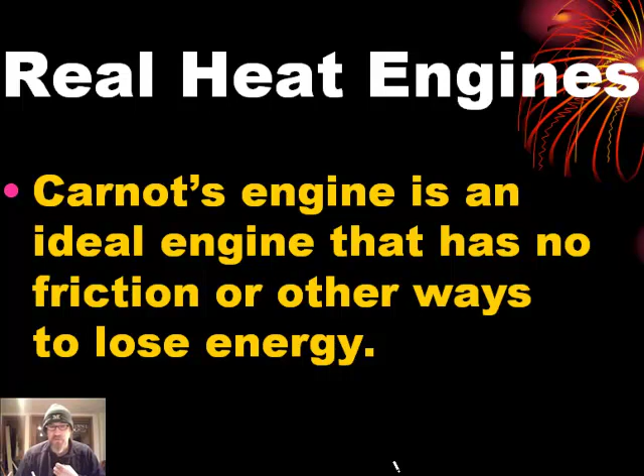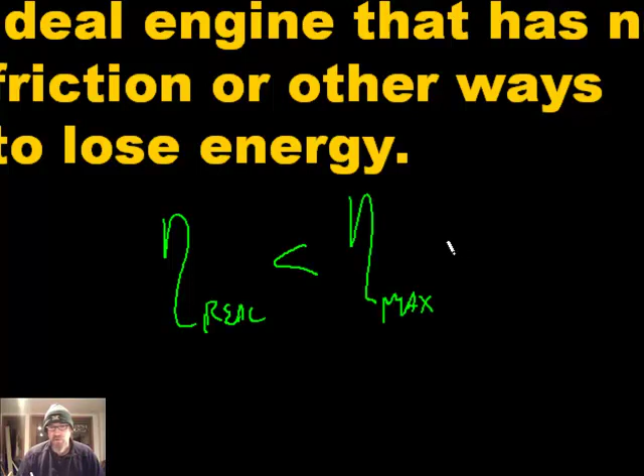A thing to keep in mind is that Carnot's engine is fictional. It's an ideal engine that doesn't really exist. It has no friction and no other ways to lose energy other than doing work or energy going straight to the heatsink. So for a real engine, the real efficiency is always going to be less than the Carnot efficiency, always less than 1 minus T low over T high.

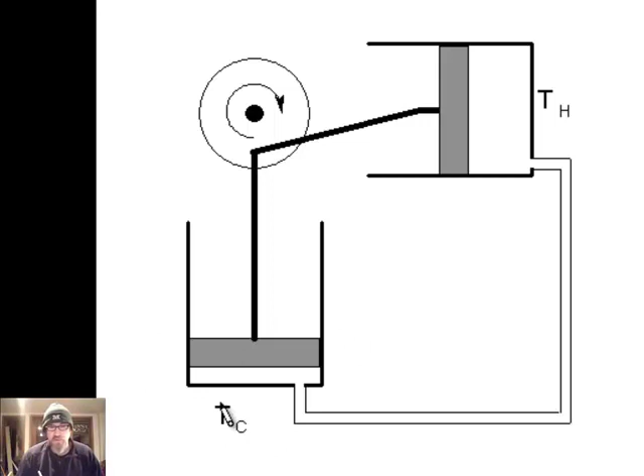A simple example of a real engine is something called the Stirling engine. One common design looks like this, though there's more than one way to set it up. Here you've got a cold temperature sink, which might be enclosed in ice or some cooling fluid, and a hot temperature source, maybe a flame from a candle, a gasoline fire, or solar panels. They're connected by this shaft. These are pistons, with gas trapped in each, but that gas is connected. It's really one volume of gas that moves between these two cylinders.

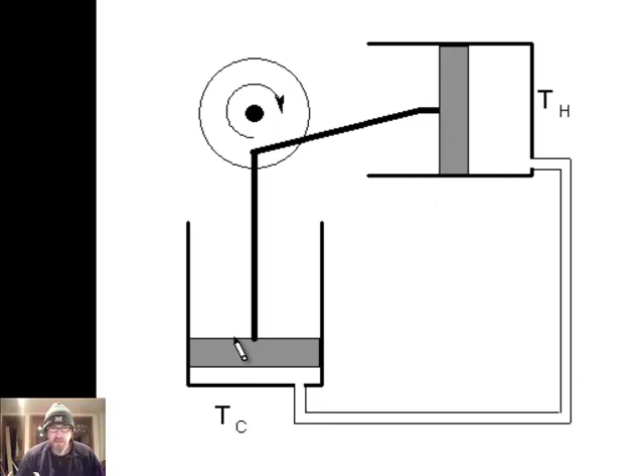In the first step of this cycle, the gas is being heated by this Q from the external heat source, so the flame heats up the gas. When you heat up gases, they expand, so what we have here is an isothermal expansion. The crank turns because the gas expands, and as the crank turns, this shaft gets pulled on, which means this piston gets pulled on, and that forces gas to go into the cold cylinder.

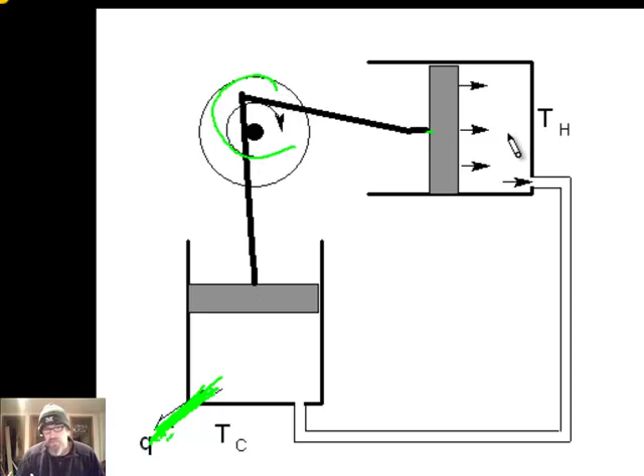What happens next is the fluid cools fairly quickly, isochorically, without much volume change, as the momentum in the crank forces the fluid into the cold cylinder. Energy is lost through heat very rapidly to ice or cooling fluid as the crank continues to turn, pushing more of the hot fluid into the cold cylinder where it cools down. This happens while the volume doesn't change much, because the piston is near the top of its motion, moving upward much more slowly and nearly coming to a stop. Then the crank continues to turn.

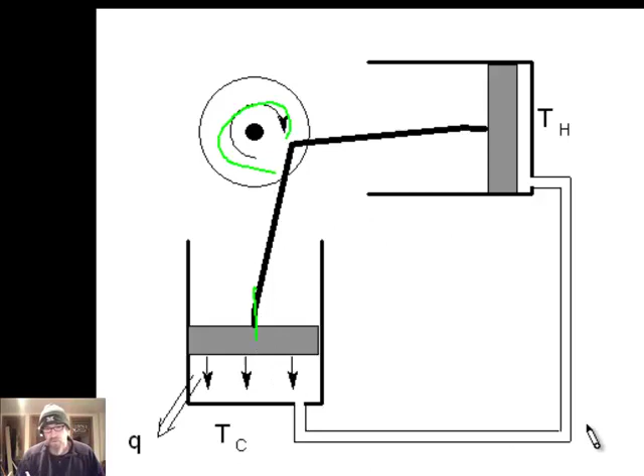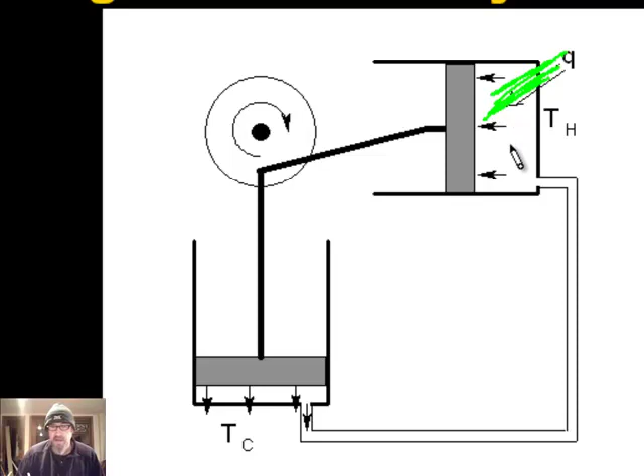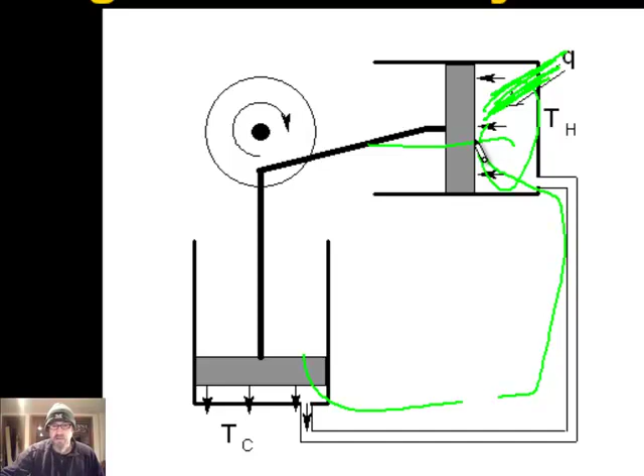As the crank turns, it pushes the piston down in the cold cylinder and moves the cold fluid back into the hot cylinder. Then the process starts over, because the momentum of the piston starts to expand the hot cylinder again. Q begins to go in from the hot source, heat flows in, that expands the gas, and it starts to push the piston outward, forcing gas into the cold chamber. The process repeats itself over and over as long as there's a temperature difference between the hot and cold cylinders.

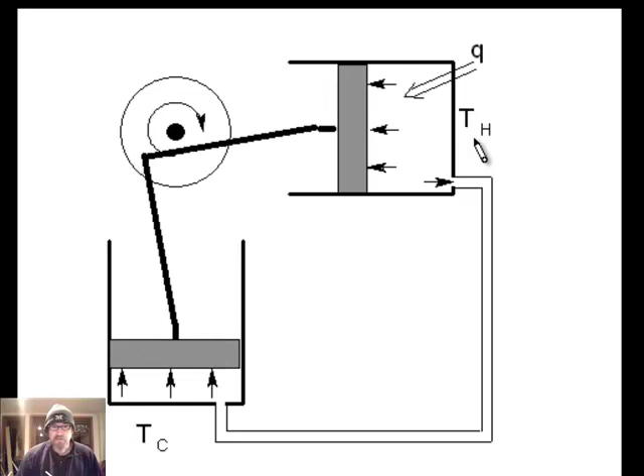There's a constant flow of energy in at the hot source, out at the cold sink, and in the meantime work is done. This is the Stirling cycle. It's different than the Carnot ideal cycle, and so it's less efficient. The primary difference is that you have isotherms, but you also have an isochoric expansion and an isochoric compression. That's not perfect. Stirling cycles are not ideal, so their efficiency is less than that of the Carnot cycle.

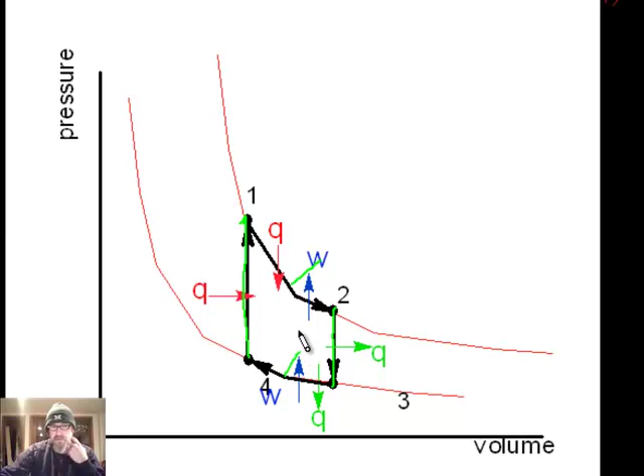There are other heat engines that exist out there. Some are quite common, some are not as common in our modern world. Reciprocating steam piston engines used to be really common; in the 1800s, that's how most power was produced. It's an external combustion engine, so you make steam by boiling it in a place other than where the cylinder is.

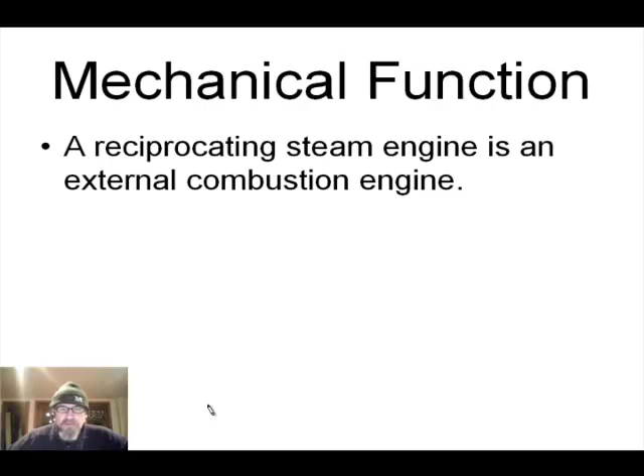One practical application of a heat engine is a reciprocating piston steam engine. This is an external combustion engine. An external combustion engine has the combustion, the fire, happening outside the engine. By contrast, an internal combustion engine has the combustion happening inside the working fluid.

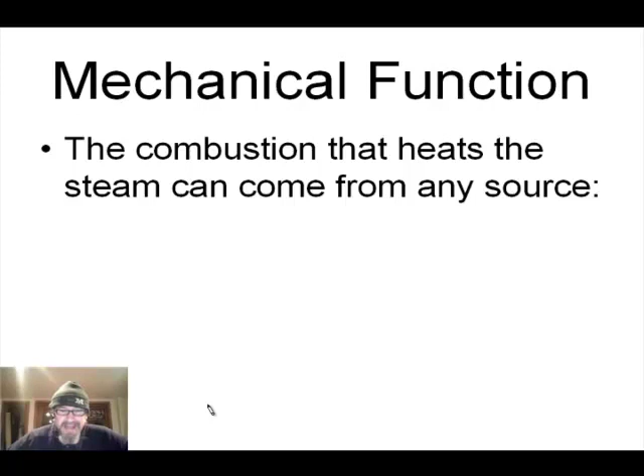The combustion that heats the steam can come from any source. Fossil fuels are commonly used, coal and oil. You could use wood, that's how a lot of steam trains were run in the early days of this country. You could also use any renewable source, or heat it up with nuclear power as well.

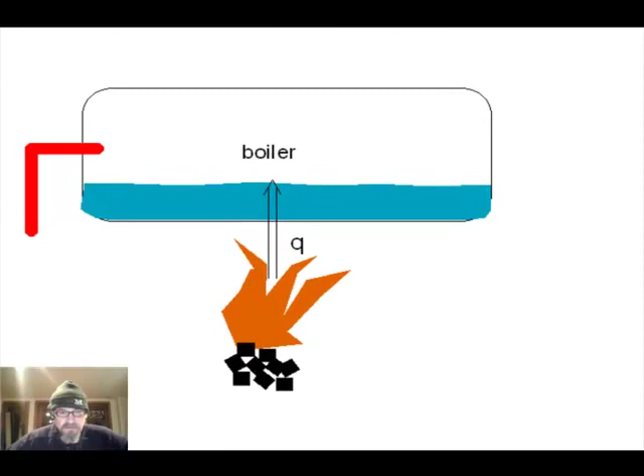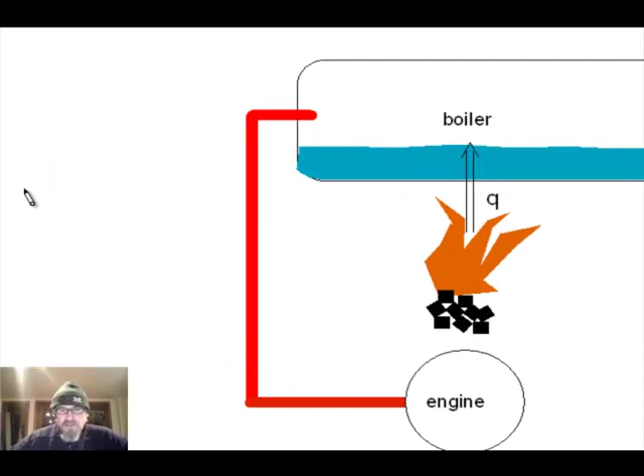The basic idea: you've got a boiler with some water in it, and you burn something, fossil fuels, coal, whatever it is, and you produce a bunch of heat. That heat goes into the boiler and boils the water. Then that steam, now water vapor, runs into the engine. The engine extracts work from it, and that goes into the surroundings to drive your train or generate power or whatever. Then the fluid cools off, loses heat energy, and ends up back in the boiler as liquid water.

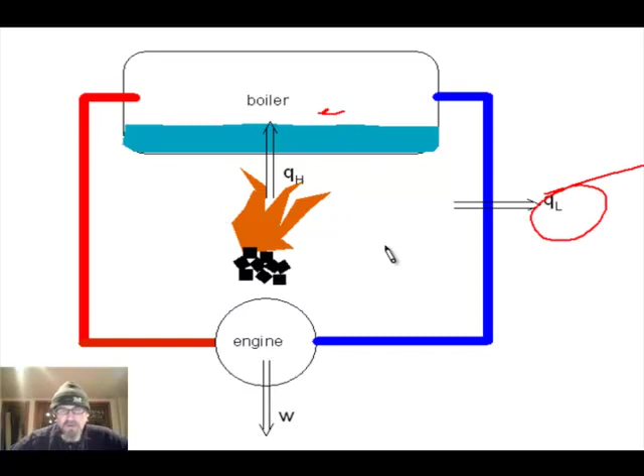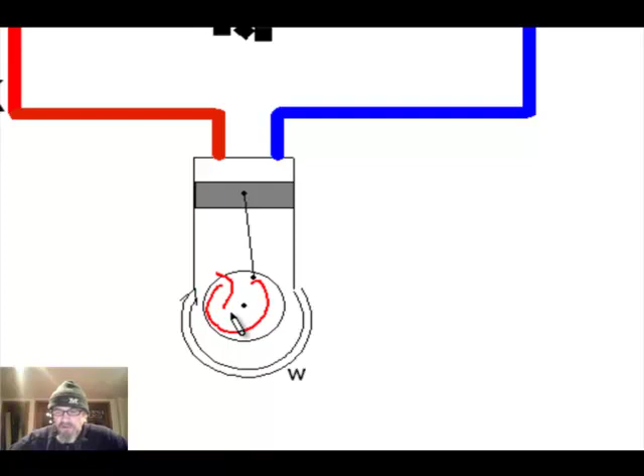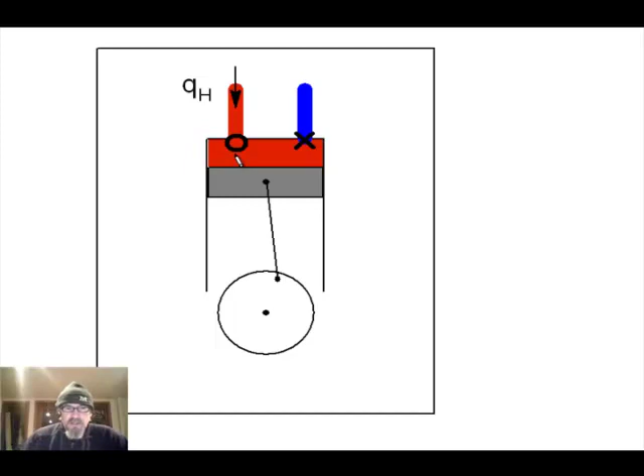If you look close up at the cylinder, there's a valve, two valves actually. One allows gas out and one allows gas in. So the steam coming in, carrying with it some heat from the boiler, enters through this valve when it's open, and that causes the gas to expand. The piston is pushed down, making the cylinder larger, until it reaches bottom dead center of the rotation, and then it starts to turn around.

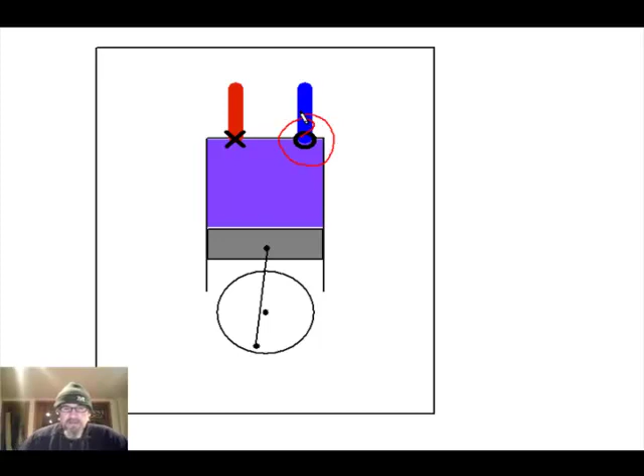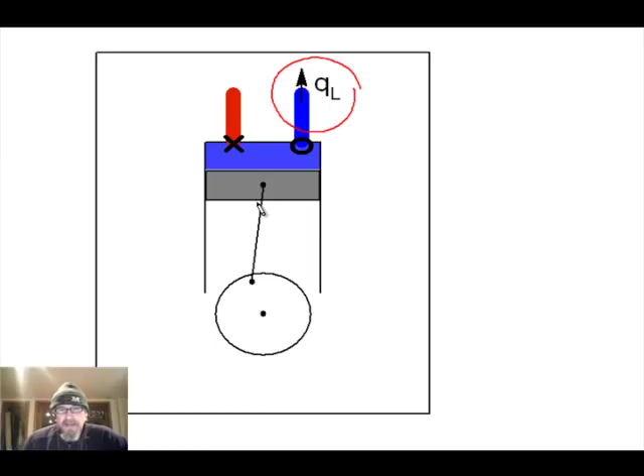This gas is now cooled off considerably, and as the motion continues around, the valve on the exhaust side opens up, and the valve on the hot side closes. The motion of the piston pushes the used up steam out, and energy is exhausted to the atmosphere with the steam. This process repeats itself over and over again, and so you get this circular power output that you can hook up to some device.

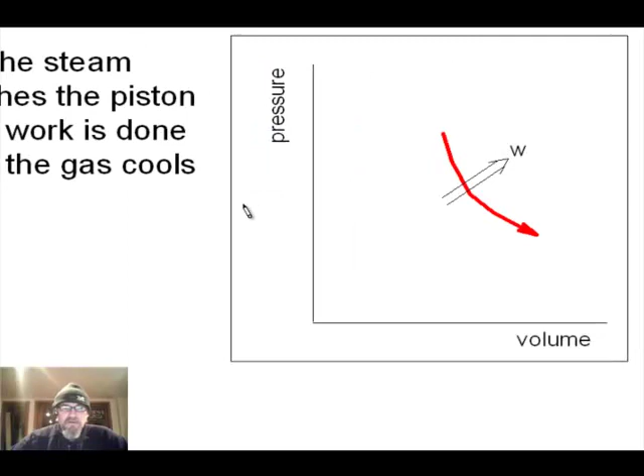Here's what the cycle looks like. As the steam pushes the piston out, work is done and the gas cools off. This is near adiabatic, not exactly, but pretty close. Then, once the piston starts pushing the steam out, the pressure is constant because the valve is open to the exhaust, and so you see a decrease in volume and also a decrease in temperature during this change. There's a loss of energy to the surroundings with the exhaust.

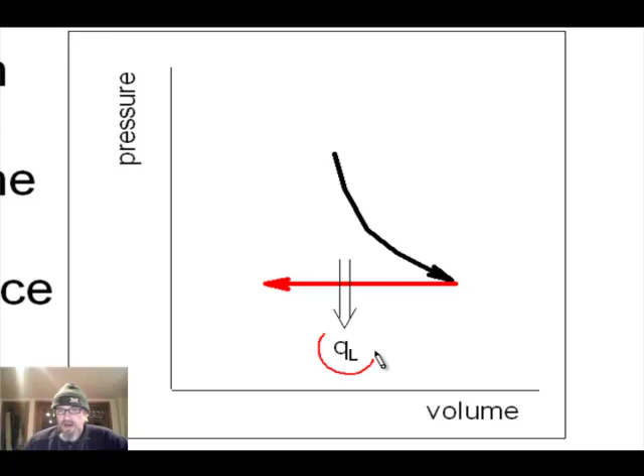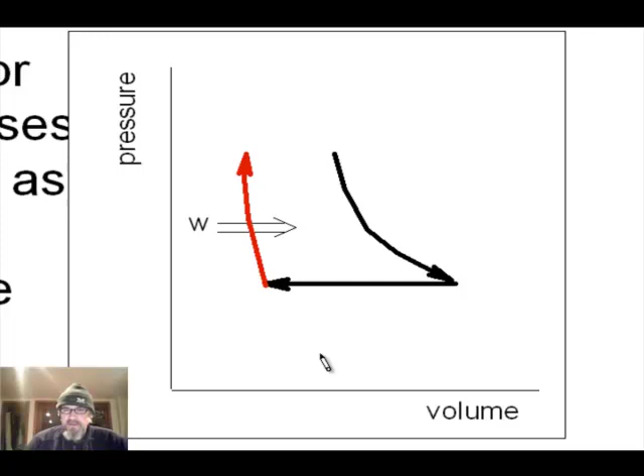Then the compressor, or some kind of mechanical pump, increases the pressure as it pumps the steam back to the boiler. That's going to be near adiabatic as well because it's happening rapidly. Then the gas is heated up and it expands under constant pressure inside the boiler, so that's isobaric. So we have adiabatic, isobaric, adiabatic, isobaric in the steam PV diagram.

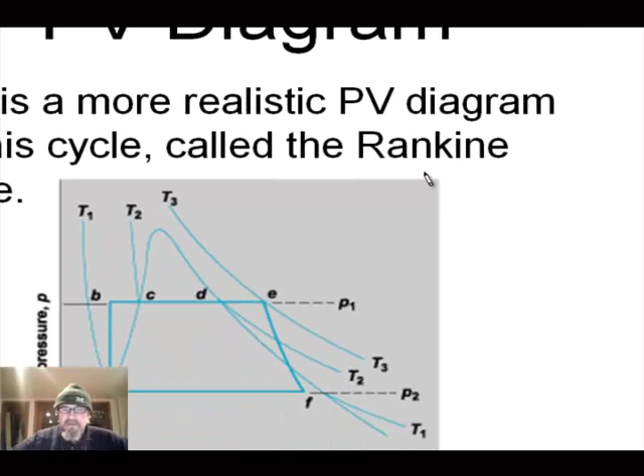This is actually more realistic, this is called the Rankine cycle. If you look at this closely, you notice that the isotherms have these goofy shifts in them. Here's T1, goes down to here, jumps up here, comes back down, and then you can follow T1 out the other side. T2, same thing, pops up here and then comes out there. The reason for that is because you have some phase changes going on. When it changes from liquid to gas, that messes with the pressure-volume diagram.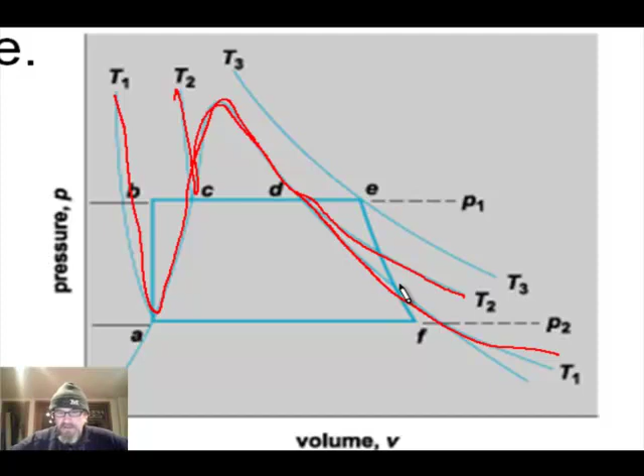The efficiency of these devices is about 10% typically if you have them exhaust directly to the atmosphere. But you can improve the efficiency by several means. One thing you can do is increase the efficiency by having a compressor pump mechanically condense the gas before it goes back into the boiler. Another thing you can do is take the exhaust gas from one cylinder and run that into another cylinder, where it runs at lower pressure.

You can see the pistons are getting bigger and bigger, and they have to do that because the gas is providing lower pressure, so for the same force you need a bigger area. That exhaust gas can then be put into another piston that's even bigger and operates at even lower pressure, and eventually it gets exhausted back to the boiler. That kind of multiple usage can increase the efficiency up to about 25% or so.

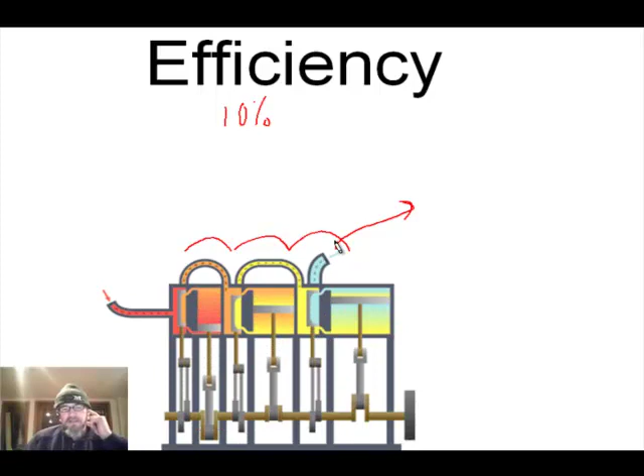What you can do in addition is collect the waste heat as this fluid's going back to the boiler and use it for other things, like heating your power plant, or making another fluid that boils at a lower temperature than water and running a different generator. That way you can get the efficiency up to about 85 or 90%.

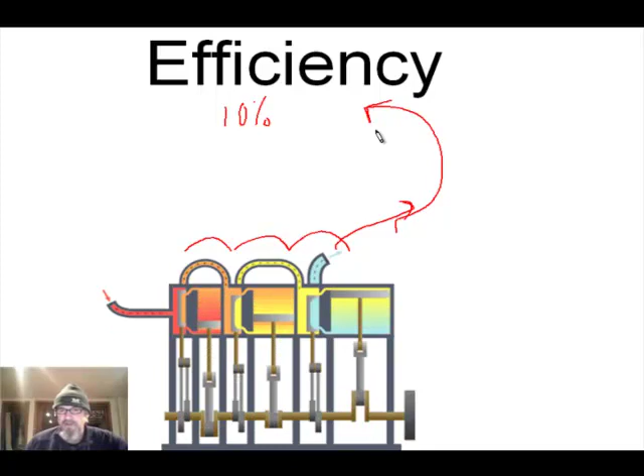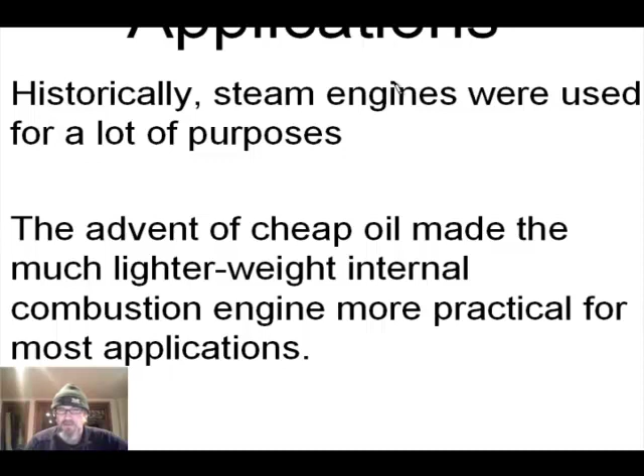Historically, steam engines were used for lots of things. The first real heat engines that were practical were steam engines, and they ran trains, power plants, and mills of all kinds, industrial mills. But when oil became really cheap and the internal combustion engine was invented, internal combustion engines turned out to be way lighter, because you don't have to carry around these giant boilers. That makes it much more practical to use an IC engine, so steam engines kind of fell out of favor, but they're still used to generate power and for a few other purposes as well.

Steam turbine engines don't have a reciprocating piston. They just spin around and around, as gas is forced over some blades, almost like blowing on a pinwheel.

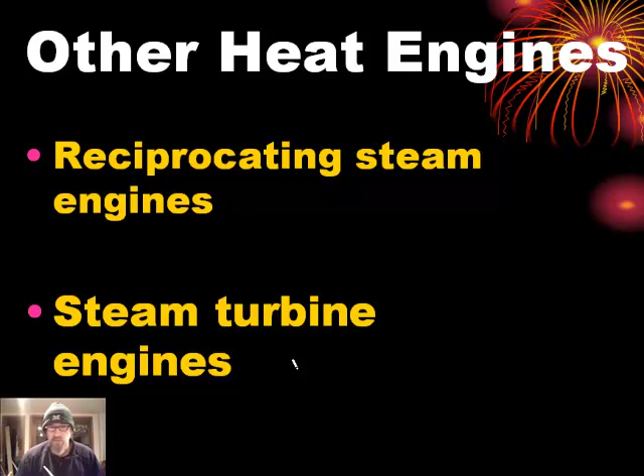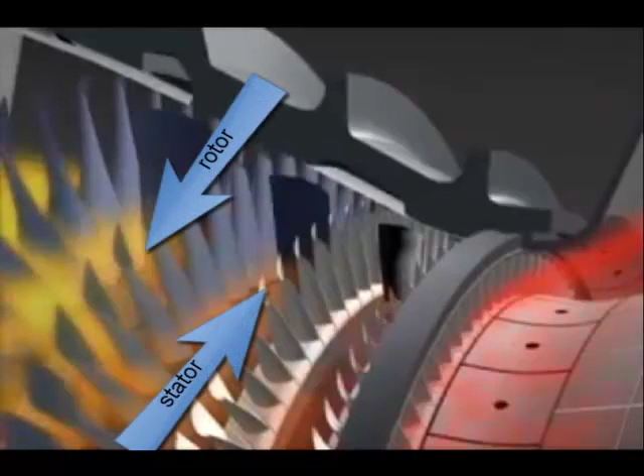Here we're watching a part of a steam turbine, and you can see that some of the rotors are spinning and some of them aren't. The ones that are spinning are actually called rotors—they're like big pinwheels. The ones that aren't spinning are stators; they just stay in place. The stators direct the flow of the steam so that it hits the rotors at just the right angle to cause them to move, like that.

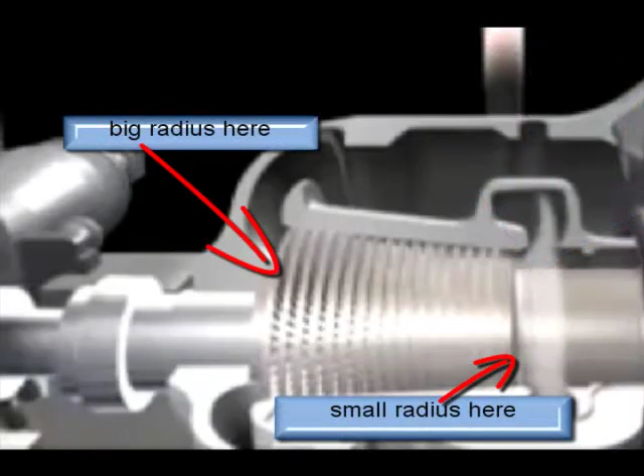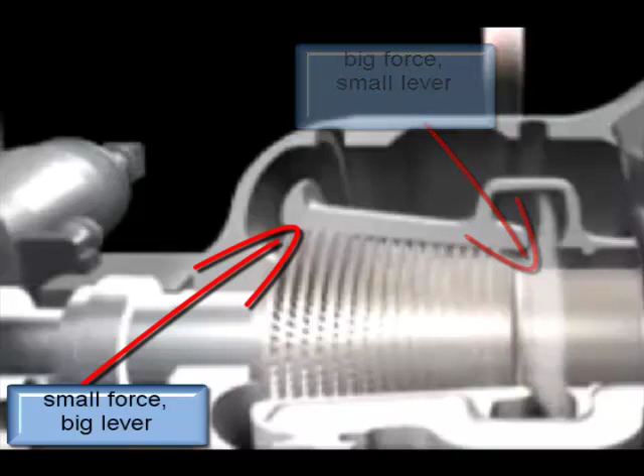What we've got here is a steam turbine stack. We have a lot of stators and rotors here, and those stators and rotors get larger as we move away from where the steam enters at the center. That's because the farther the steam goes, the less force it has, since more of it has been used to turn rotors. With less force, to make the same torque on the same shaft, you need a bigger lever arm, because torque is force times lever arm. So the rotors get bigger, with a bigger radius and bigger lever arm, as you go farther down the stack, providing a constant output of torque. Here we see the steam washing down the rotor and back up a larger stack on the other side, and then the output shaft drives some kind of generator.

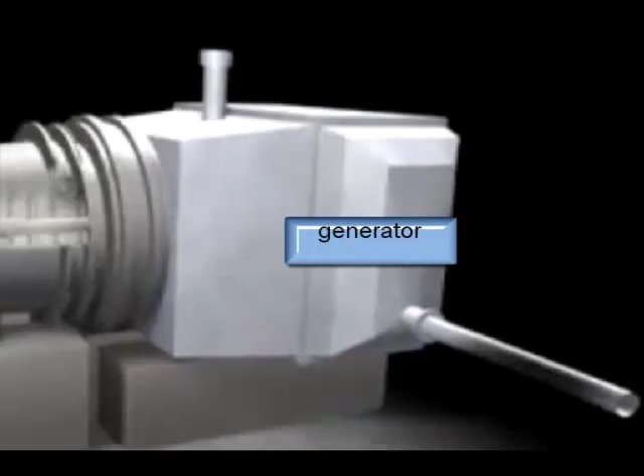Reciprocating internal combustion engines are the ones that are most common today. Our cars and trucks are all powered primarily by these gasoline engines.

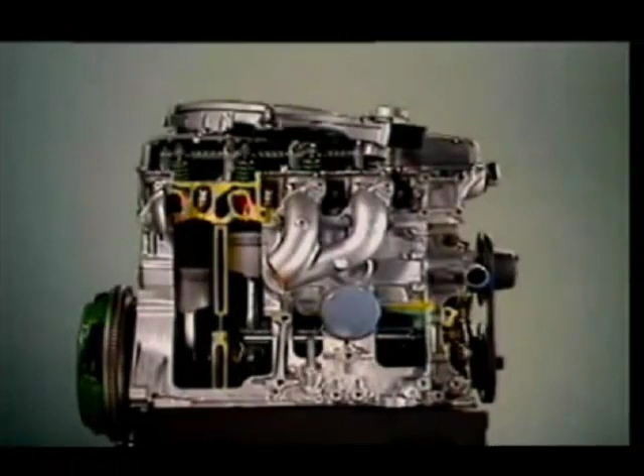Here we see a cutaway view of an internal combustion engine. There are multiple cylinders here. It's a complicated engine with a lot of complicated parts, but the two moving pistons that we see here are the most important things.

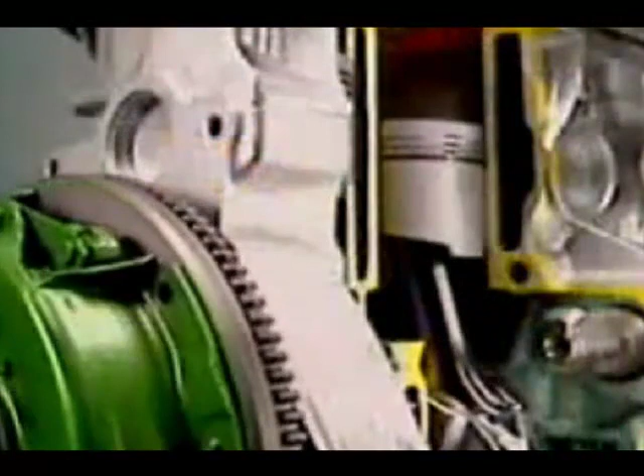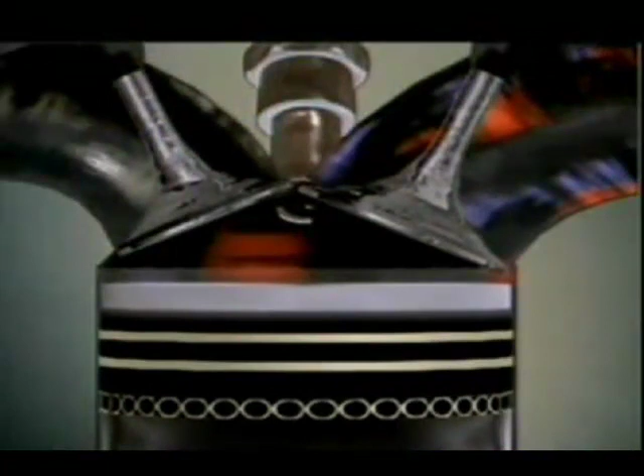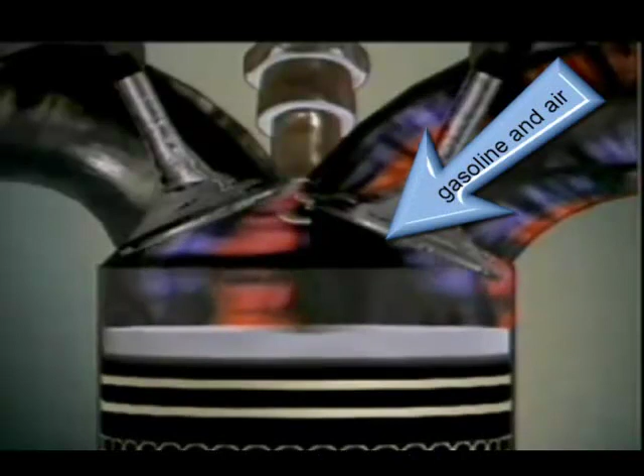We see two valves here. The valve on the right is called the intake valve. That opens up to let a mixture of gasoline and air go into the cylinder. That happens as the piston moves downward, increasing the volume of the cylinder. The gasoline and air mixture rushes into the cylinder until it reaches near the bottom of the stroke, when that valve snaps shut.

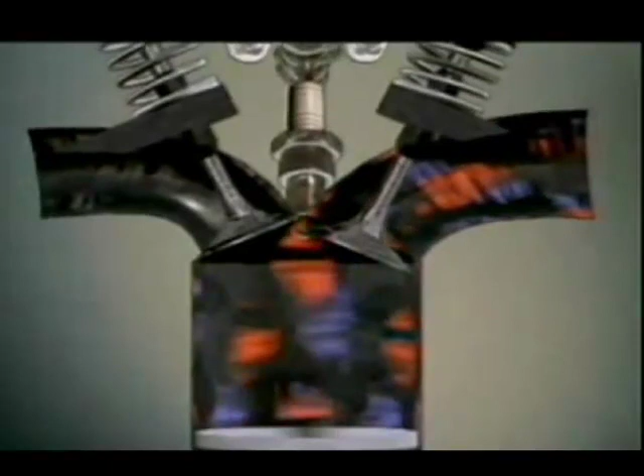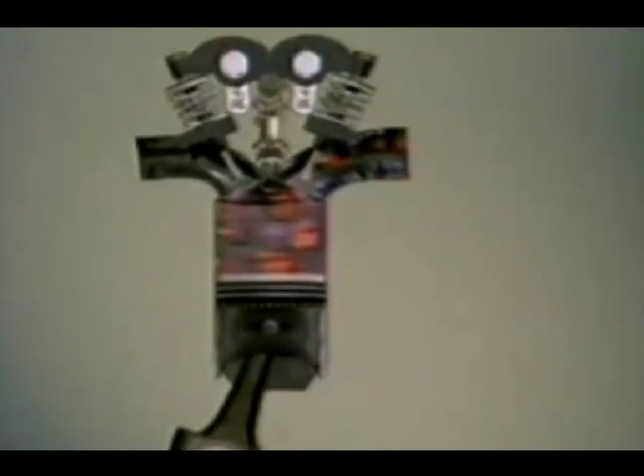With the valve snapped shut, we now see with this larger view that the cylinder is getting smaller as the piston moves up, driven by the momentum of the crankshaft down below, and compresses the gases into a smaller space. It makes their temperature higher, and it makes it easier to ignite.

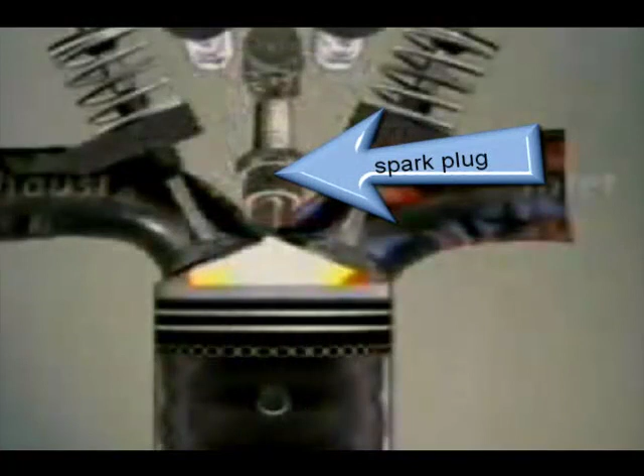That's the next stage. The spark plug located at the top of the cylinder ignites all these gases, and they burn very rapidly. That causes them to expand, which pushes the piston back down, increasing the volume of the cylinder.

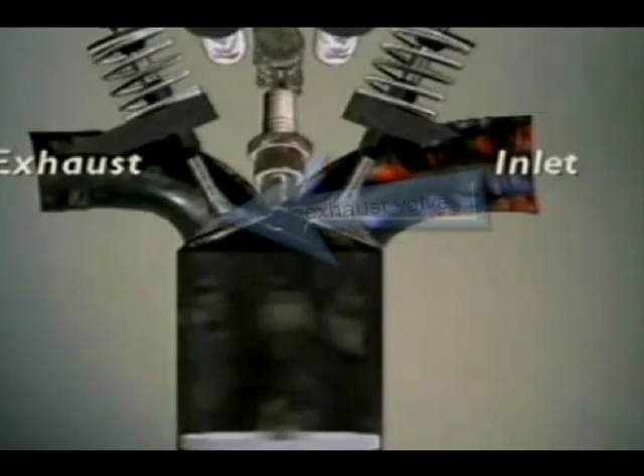Next, the exhaust valve on the left opens up, and the exhaust gases, the products of combustion, are pushed out of the cylinder as it gets smaller when the piston moves up.

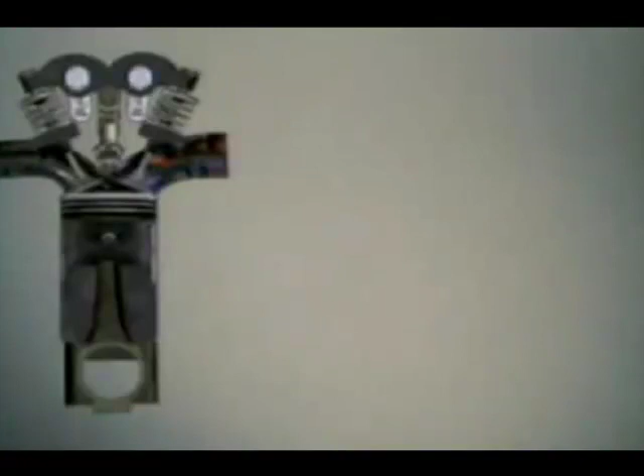Let's watch the whole cycle in action again. Here's intake: air and gas go in. Intake valve shuts, the mixture is compressed, the temperature rises, and the spark plug ignites it. The power stroke occurs — rapid combustion drives the crankshaft around again. Then the exhaust valve opens, and as the cylinder gets small with the piston being pushed up, the exhaust gases leave.

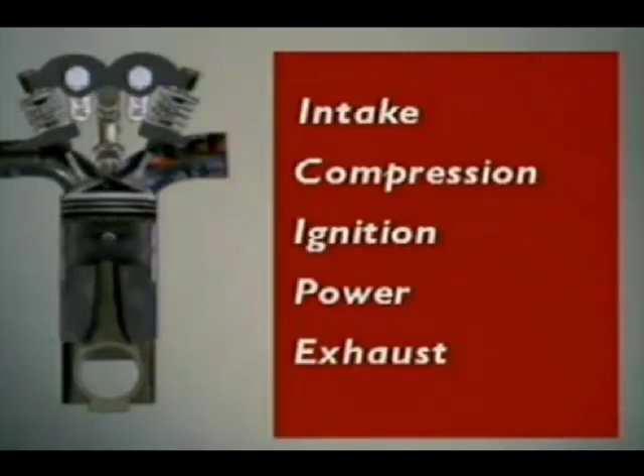Diesel engines combust a different way. They combust diesel fuel. Gasoline engines require a spark; diesel engines don't. Compression gets it hot enough just to light it off that way.

And then there's another type of engine that's less common today, and that's a rotary internal combustion engine. Sometimes these are called Wankel engines.

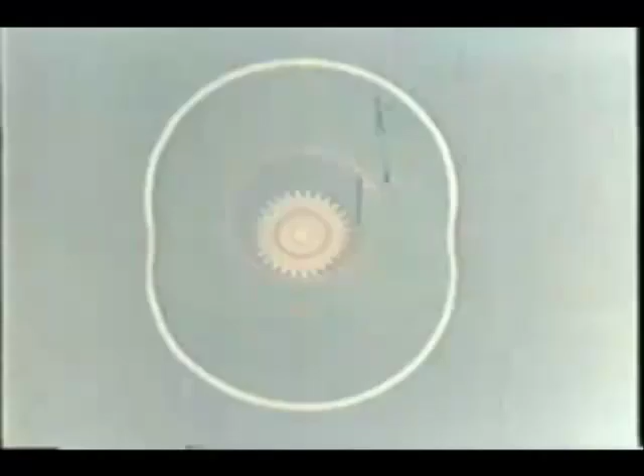The rotary engine is based on this very clever idea: if you offset it, make it not go on a centered circle, this tri-lobed, triangular-looking rotor sweeps out this shape. Someone decided to take advantage of this fact, that it makes different size spaces.

You can see this volume of gas getting squished down into a smaller space and then opening up into a larger space again. As the rotor continues to move around, the space the air is squished into gets smaller again, and the cycle repeats itself.

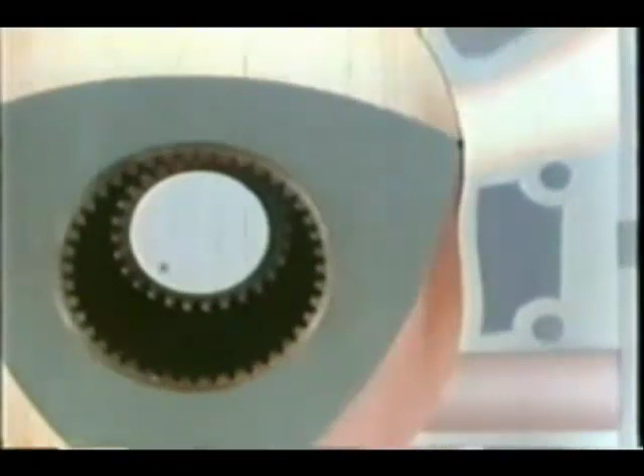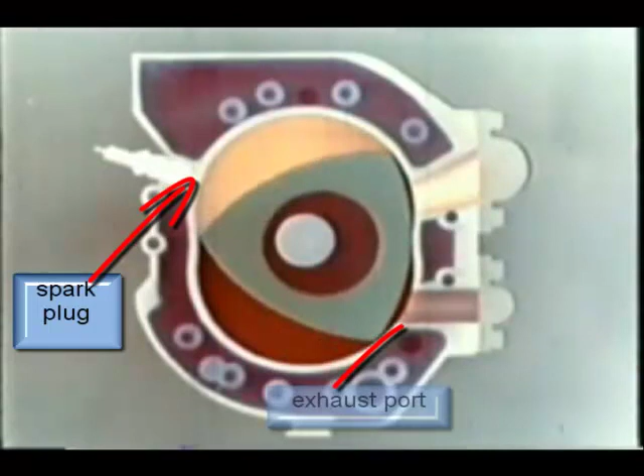So here's what we have going on: as it sweeps past the intake port, it takes air in, compresses it, spark causes it to expand again, and then it sweeps past the exhaust port, and it gets pushed out. That cycle just continues.

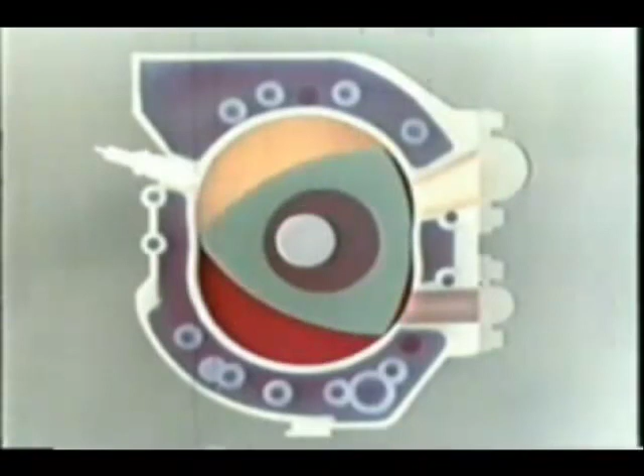So instead of having one power stroke every two cycles like you do in a reciprocating piston engine, you have three power strokes every cycle. There was only one drawback — the seals that cause these little patches of air to stay in place would wear out very quickly.

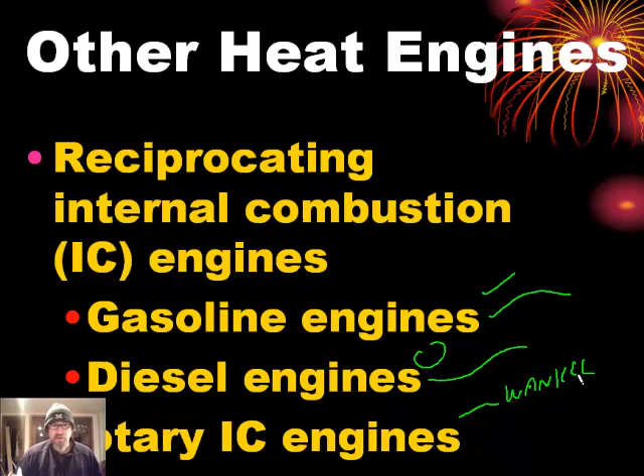Those were used in a few sports cars in the 1980s and 90s, but are not commonly used anymore.

And then there are jet engines. There are ramjet engines that just use forward motion to compress gas and oxygen into a chamber, and then it's ignited. Turbojet engines use the motion of the engine itself to compress, so you don't have to be moving fast to make a turbojet work.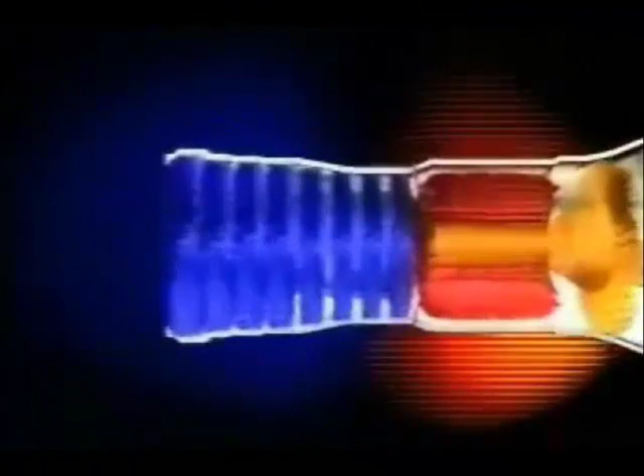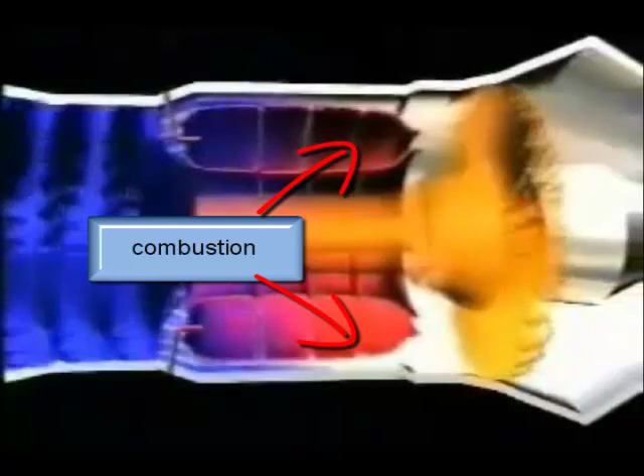This is a simplified picture of a turbojet engine. What we're looking at right now is the compression zone. This is the combustion zone, and behind that we have the turbine, and then the exhaust comes after that. How it basically works is gas, air, is forced into the jet.

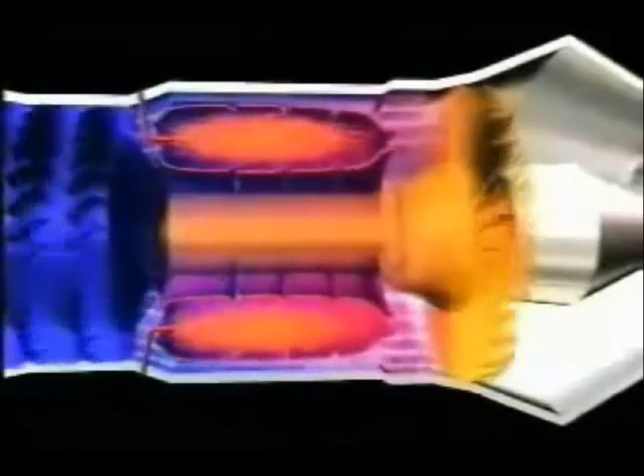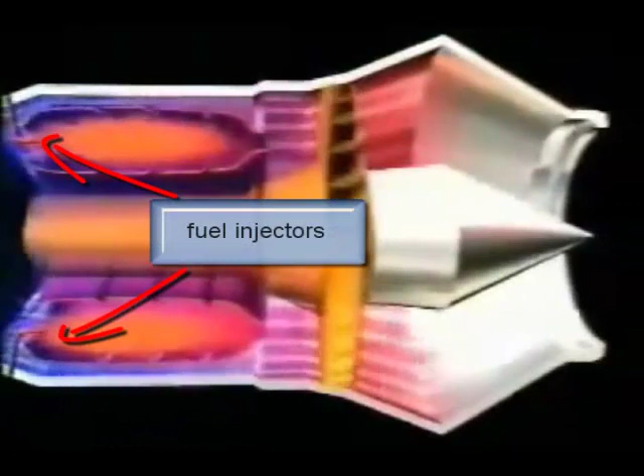The compressor makes it smaller and smaller, forcing it into a smaller space because it's cone-shaped. The air then gets very hot and moves very fast, and in this zone up here you can see there's actually combustion — fuel gets squirted in there and it ignites, making it even hotter and faster moving.

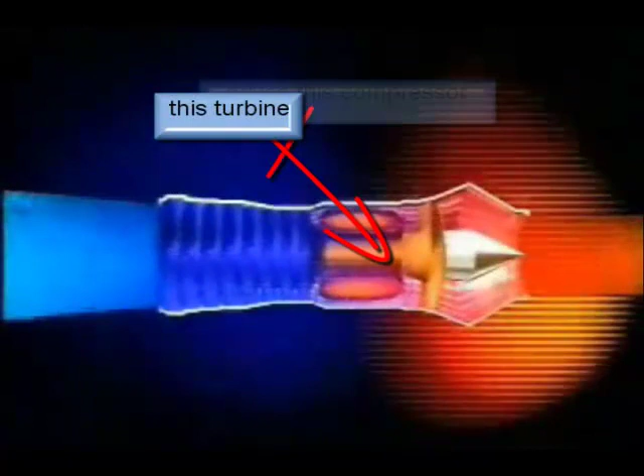The gas then moves past this turbine, which is like a pinwheel, and that spins really fast, driving the compressor, and then the rest of the energy is used to just drive very hot gas out the back end. By Newton's third law of motion, if gas, matter, is moving backwards, then the jet has to move forward.

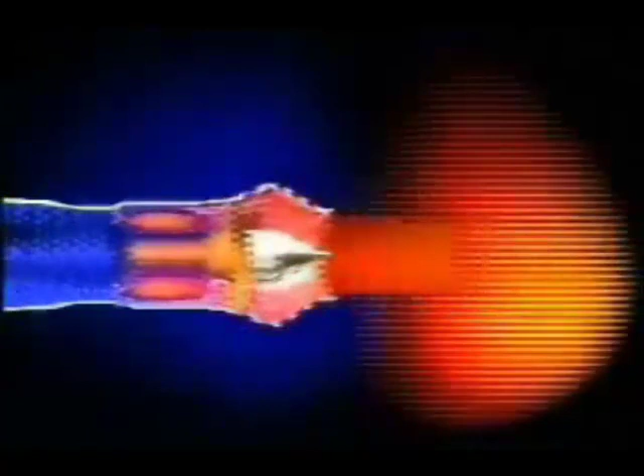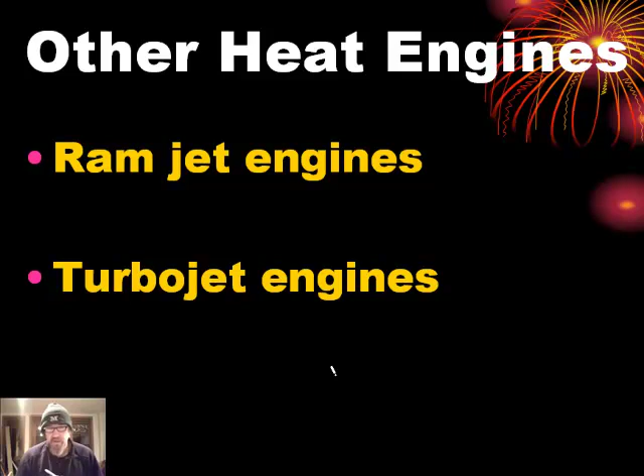All of these kinds of engines and more exist out there, and the ones I've listed here — steam turbine, steam reciprocating piston, internal combustion engines, and these two jet engines — you should learn about. Go out on the internet and find sources that will tell you how each of these types of engines work, and be prepared to explain them.